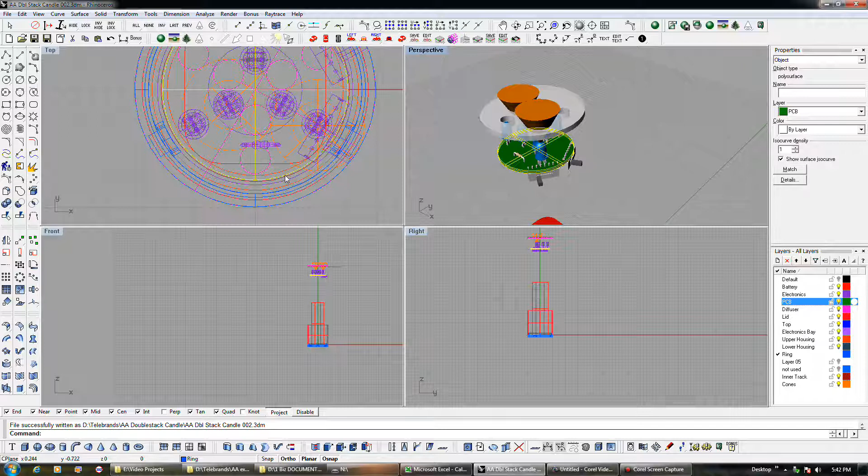Okay, I highlighted the circuit board because I was thinking this board's almost the right size. It's also, but it's a little too big probably.

But this is going to end up being a two-circuit board design, one for switches and the other for the LEDs. But we'll still have to see how that plays out.

Excuse the background noise, I got a 3D print running as an experiment.

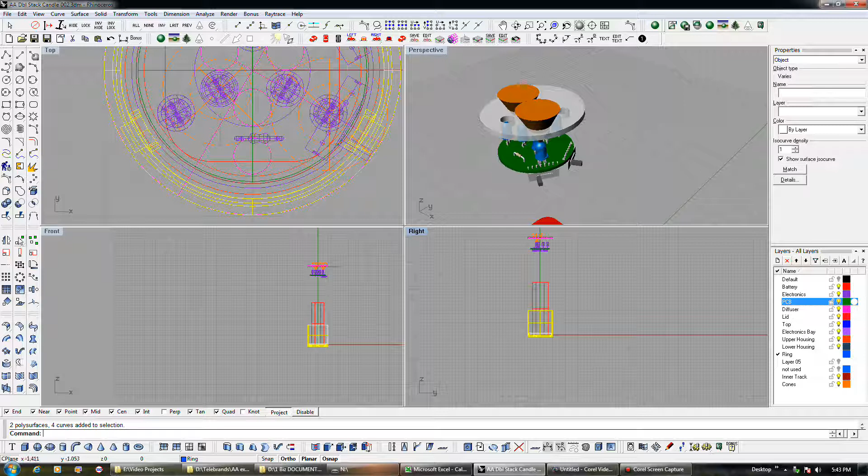So let me go ahead, now that we got this part done, let's go ahead and scoot this up here where it belongs, with that other diffuser. Okay, so that's where that's going to be.

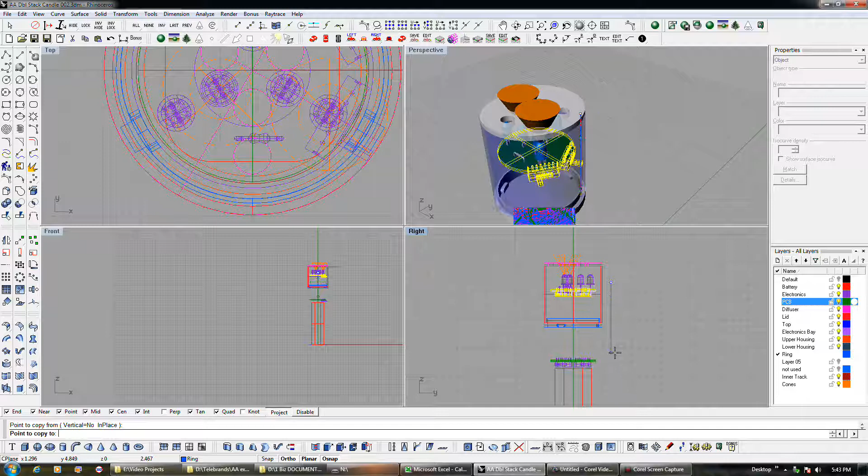Let me go ahead and, since I'm not sure about the circuit board yet, let me go ahead and grab this and copy it. I might use this later in one way, shape, form, or another. Let me go ahead and delete these two switches because they're not going to be there since there's the tube in the way.

This bottom, now normally when I do these designs I start from the bottom up. I usually start with a battery holder and work my way up. But in this design, given the constraints of this diffuser, I'm probably going to start from the top and work my way down, but it's going to be a little awkward for me, so just bear with me on that.

So I got to start thinking about how we're going to encapsulate this top part of the board. And remember, since this top cover is going to be a separate piece, it doesn't have to be the same thickness. That's why I'm kind of eyeballing this circuit board.

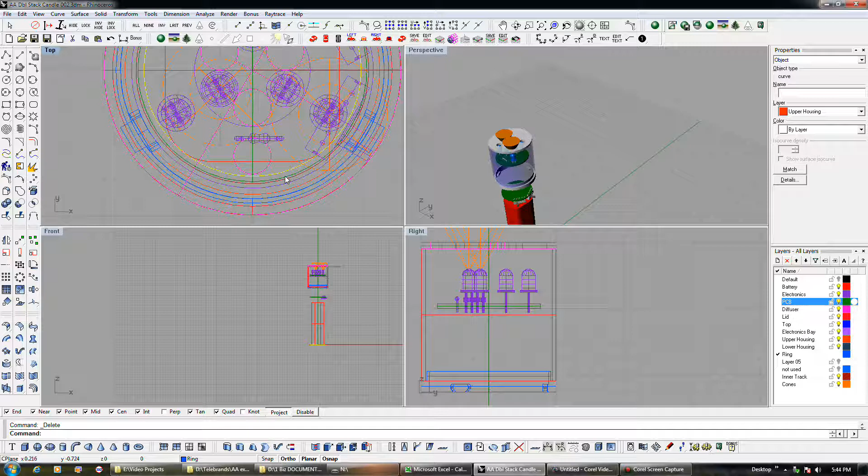Because if you recall, this is going to be our inner wall, and this is our outer wall, right? So the circuit board will be a little bigger than that, but that may actually be fine for what we're doing here. It just depends on how this whole thing materializes, and this is where it's going to get confusing, because remember, we got this track guide that we got to worry about.

Which, like I said, I probably ought to go ahead and put this diffuser in its appropriate position before we proceed any further. That's probably the best thing to do. So I can put it in its retracted position, until it says center.

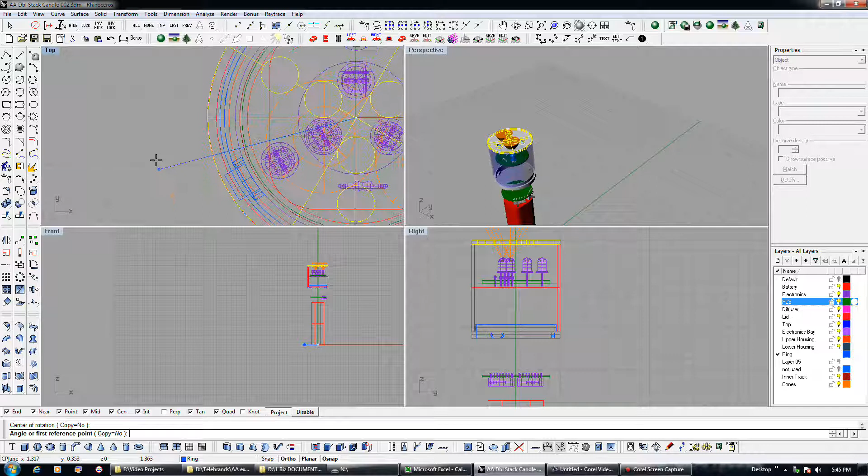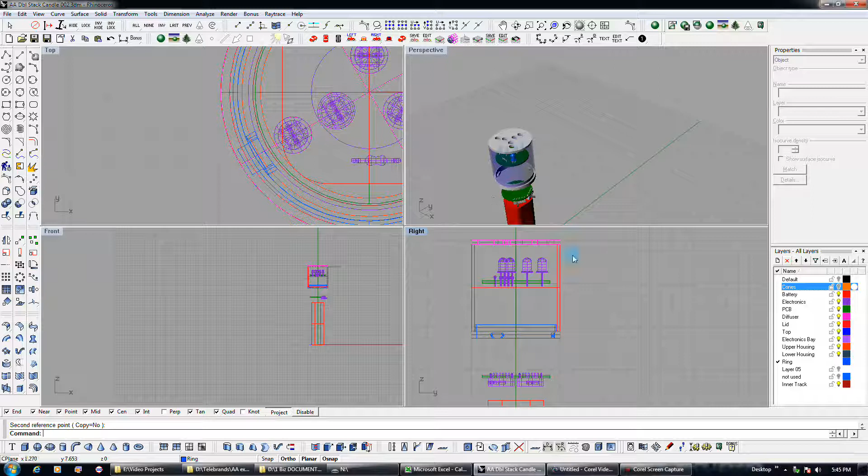There we go. Okay, I don't think we need the cones on right now, so let me move that up there. I always put things like this at the top. And blank those out. Let me again put this in its retracted position.

But we still don't know exactly what retracted means yet. Oh, come on. It's going to be somewhere around here. We don't know exactly where, but it's going to be somewhere around there. So it depends on how thick I make this lid and everything, but I wanted to get this basically in its retracted position, especially before we start thinking about drawing any guides or anything.

And that's where I want to position it, because this is going to be the guide. However I make these guides, and this is going to be complicated, but however I make these guides, that's what's going to be subtracted from this position. It's an easier drawing position, because I got to draw some kind of form or something, and it's subtracted from everything else. Probably that's probably how I'm going to do it.

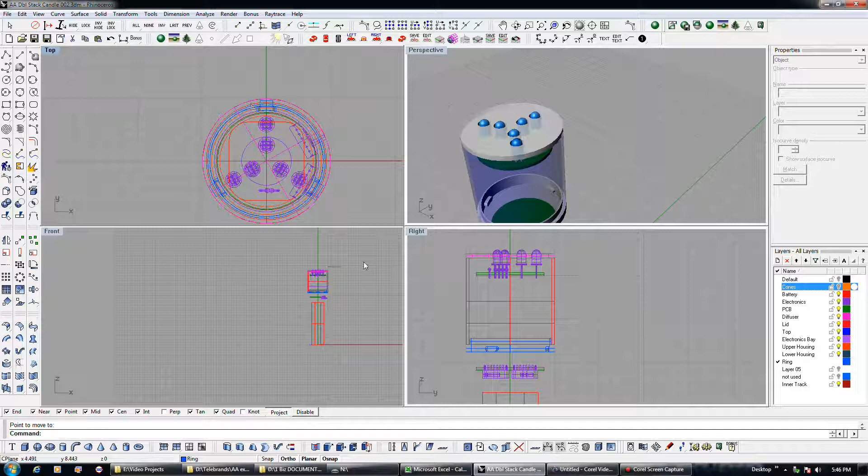We'll see. But for right now, again, this circuit board is a pretty attractive proposition, because we know, okay, this by all means is going to be our...

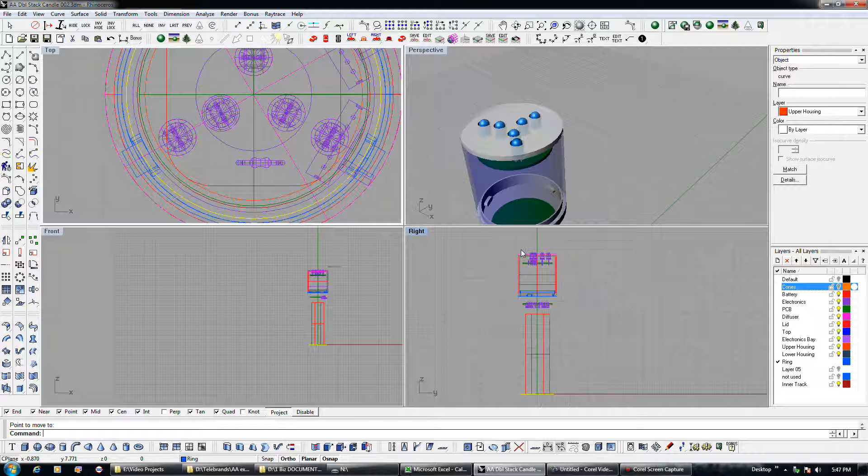In fact, since we're working on this, I'm going to go ahead, and I usually do things this way. I mean, you can actually adjust your coordinate system if you want, but in Rhino, I usually just adjust my model instead.

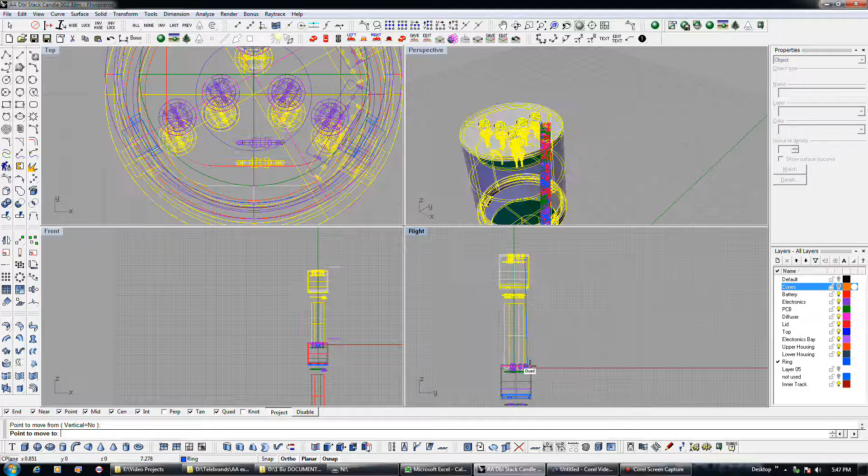I'm going to go ahead and grab this from here, everything except that circle, and put it on elevator mode. So I've adjusted...

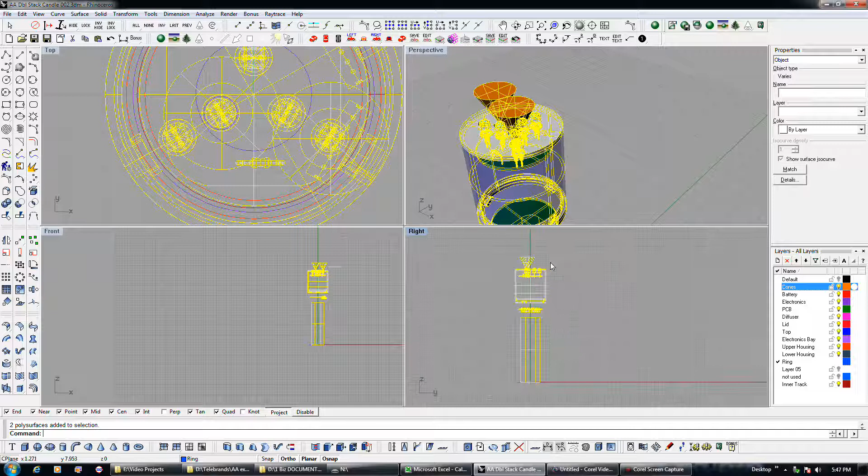Whoops. Hold on, let me light up the cones. Gotta make sure all my layers are on before I do this. That's one of the drawbacks to it. So I'm going to go ahead and adjust this.

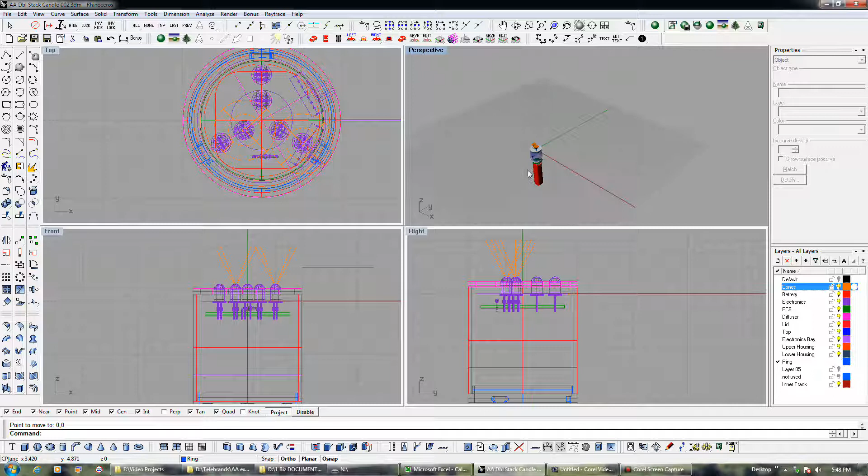Where it's down here, near our working plane. Oh, shoot. Okay, well, like I said, turn the cones back off. Don't need them right now. But like I said, this, whoops.

Okay, this is the outer part of our housing, and we'll want that to be part of the cover. So now this piece, when we print, this will actually be the bottom layer, and it'll print this direction. This will be the top layer. In other words, this part will end up being upside down, so we'll get a nice flat mirror finish on the top of this, which looks nice.

But the question is how thick to make it, and how are we going to do the bottom piece, because that I'm still not sure about.

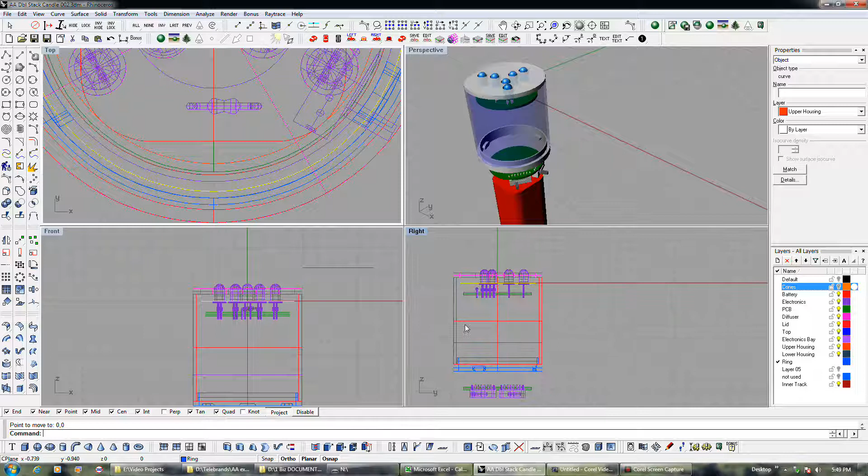Let me just do a test extrusion to see how things look right now going past that ring. So basically, that's how the finished item might sort of look, except it'll be a little higher than that. But you can see kind of the clearances of this inner ring and everything like that.

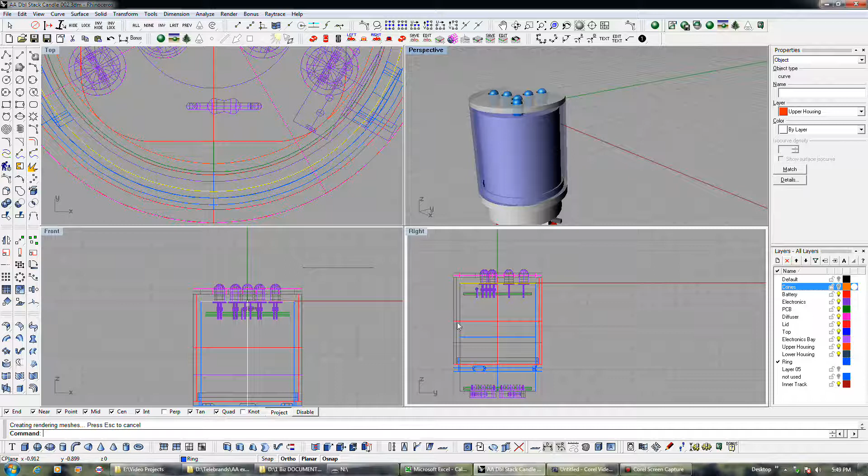We want to kind of keep that intact. There'll be a little bit of play between this and this, so it'll be a little wibbly wobbly, which I'm trying to avoid, but I can't avoid it completely in this case since we had to put this glue stopper here.

I was just thinking that I could actually make it so it's removable, the whole assembly is removable, and I'm kind of considering that possibility, but still I'd rather just do it this way. It's kind of hard to change your mind on a non-parametric CAD system, because we'd have to redo all of the work.

That's why, when you're doing this kind of design work, it takes a lot more with a program like Rhino or most other general purpose 3D CAD programs, you really got to think things out a lot ahead of time, because you could do hours of work, doing a bunch of operations on a single part, and then have to go start all over again if you need to make a significant change to it, particularly if that's fundamental. It's pretty aggravating.

That's why a parametric CAD system like SolidWorks or Solid Edge is way better to use for things like this. But they tend to be expensive. I'm not aware of any cheap parametric CAD systems right now. There may be some out there, but I don't know.

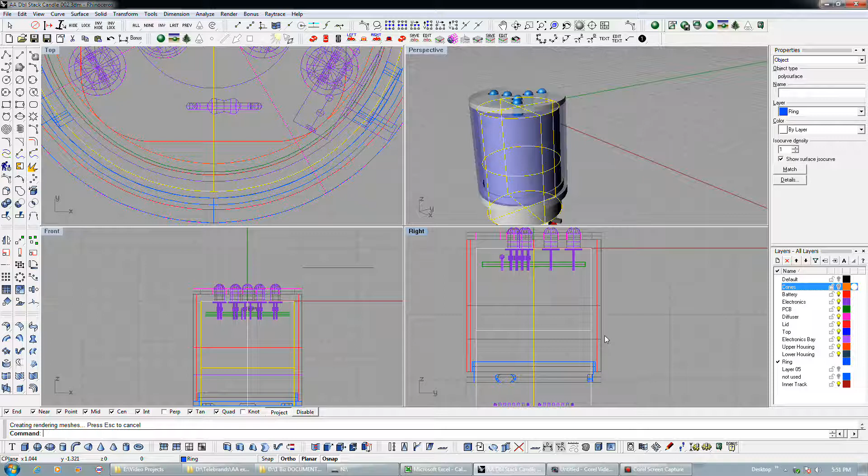Okay, but like I said, where exactly we want this thing remains to be seen. Again, this is too low. In fact, accounting for the thickness of the top of the lid, it would be probably more like there.

Giving us an effect like that in final form. Again, this lid probably just needs to be a sixteenth of an inch. It's not going to bear a lot of force or anything like that, so it really doesn't have to be that thick walled.

What I'd like to see for this circuit board is, and notice too how I have the standoffs on this LED a little bit above the circuit board, and that's because when you solder a circuit board, even with a hand soldering iron, it tends to expand. The circuit board actually expands in thickness. So by the time you finish making your joints and the circuit board cools down, there's almost always a gap, even if the LED is right down to the board, it's almost always a small gap under it, a good 10 mil or more a lot of times.

So that's why I have some tolerance in that too, because I certainly wouldn't want to make a lid or anything like that and try to stick it on this thing and have it not fit, because the LEDs are actually, this distance here between the circuit board and the LED base is actually taller than I think. So again, that's why you want to have some loose tolerances even on that.

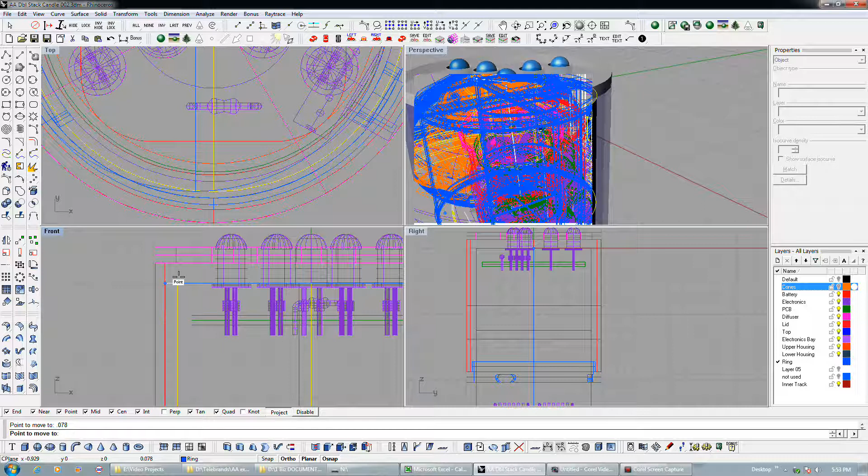Now, I'd like to add some tolerance, especially due to layer discrepancy and everything. Instead of making it 63 mil, let's make it 73. Actually, say 78, just to give us a bit more tolerance for error, because we'll make the wall thickness 63 mil, which is pretty exactly 1/16 of an inch.

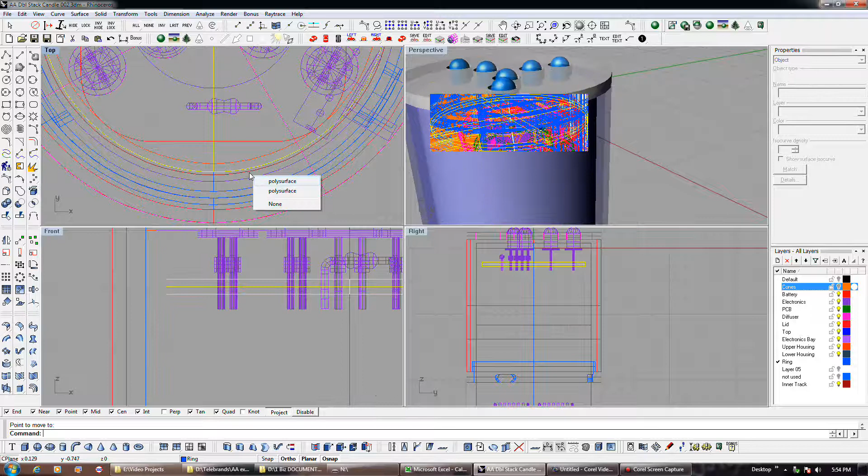Now, having said that, let's see this cap. So we've got our circuit board there, and this right here, let me see how wide that is. I think I know what this is. Yeah, it's about 13 mil.

It's about 26 mil total. Because when I actually make my circuit boards, they're going to be a little smaller than this, since I've got a kind of loose tolerance on my end mill. So the circuit board, whatever diameter it happens to be, is actually going to be a little smaller than this. But 13 mil on this circle here would be 26 mil total. That plus the discrepancy in the circuit board should give us enough allowance to where the board will fit.

If not, you can always sand a circuit board down if you have to, belt sander or whatever. So it's not that big of a deal.

So what I'll probably do is grab this little circle here. We'll just go ahead and reuse it, because that looks like a healthy tolerance to me. So I'll bring that down level with the circuit board. This is going to be our circuit board keeper.

And again, we're probably going to do switch wells, just like I showed you in that other video, for this design as well. So that'll be part of it. Now, doing switch wells is pretty complicated, and there's certainly other ways I could hold this in, involving fasteners or what have you. But yeah, I think I'm going to do it this way.

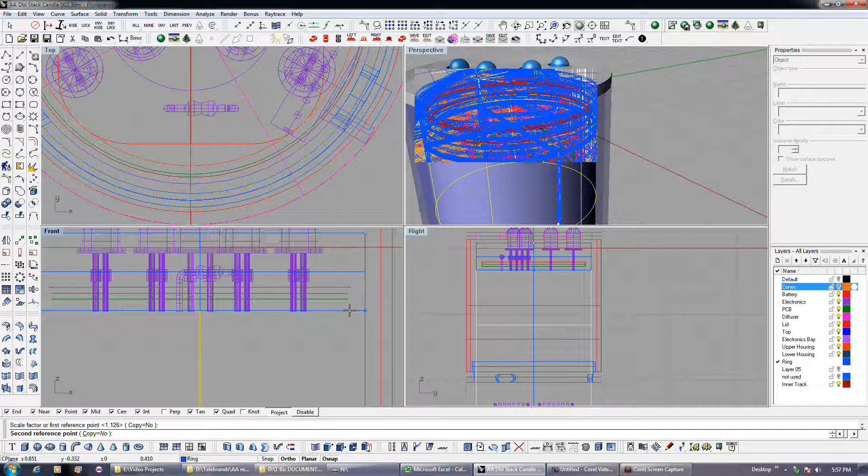Again, this is the opposite way I normally work, so just bear with me. But yeah, I think I'm going to use this here, which is not a half bad position. Let me go ahead and just do this.

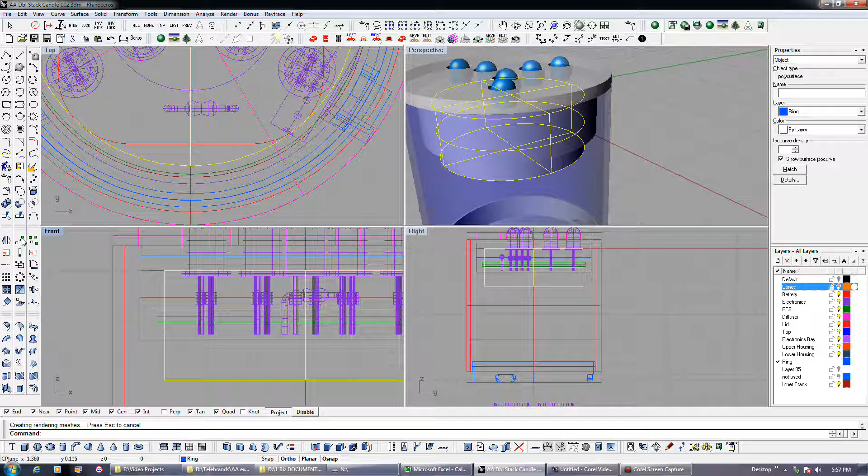Let's see what we have here. Yeah, because it's 78, 63. So that's 15 mil. So I'm going to move this down by 15 mil. Oops, sorry, move it up by 15 mil. So that should give us...

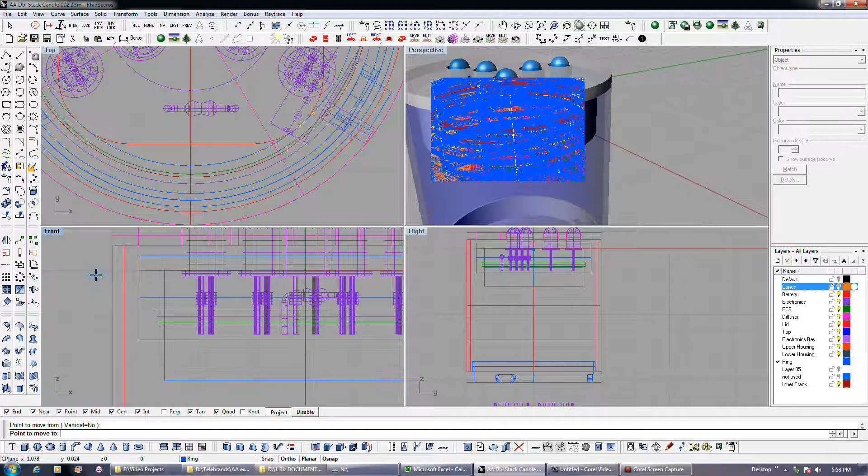Pull that out so it's straight. So that should be about a 1/16 of an inch right there. Yep, 0.063. So okay, that's that piece. That's going to come out of the center, and that will clear our LEDs, as you can see, between that and that.

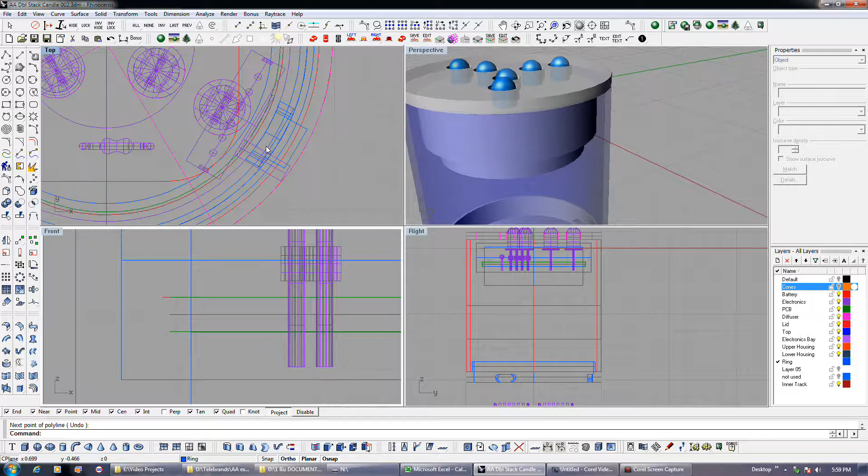Then next, I want to... let's see, I wonder how much space we've got to work with here. I might need to shrink this circuit board, and it's okay if I do. Just give me a better well, but let's see. I got to pay attention to what's going on over here, though.

For right now, I can go ahead and hide the diffuser and the lid, and... where is that on? Oh, ring.

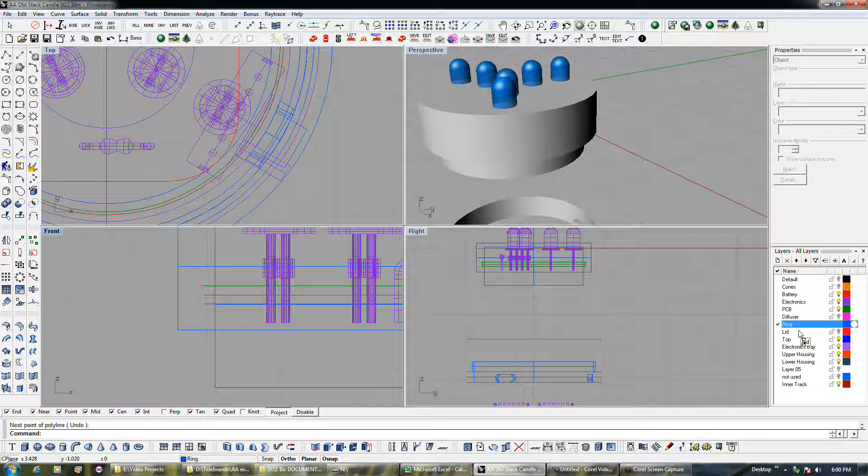Well, damn it, I need to be drawing on the top. Actually, so I'll change the object layer in those so I can hide the ring, all these concentric circles here, and keep track of what the hell they are.

Okay, so this basically, I think we can get rid of these right now. I'll go ahead and stick them on one of our not used layers.

But yeah, that's our outer lid there. But like I said, I might go ahead and shrink that circuit board, because I think we could use the extra space. And that circuit board from there to there, we only got about 88 mil, and like I said, I can get away with less, but that means I'll have to make this top part thicker though.

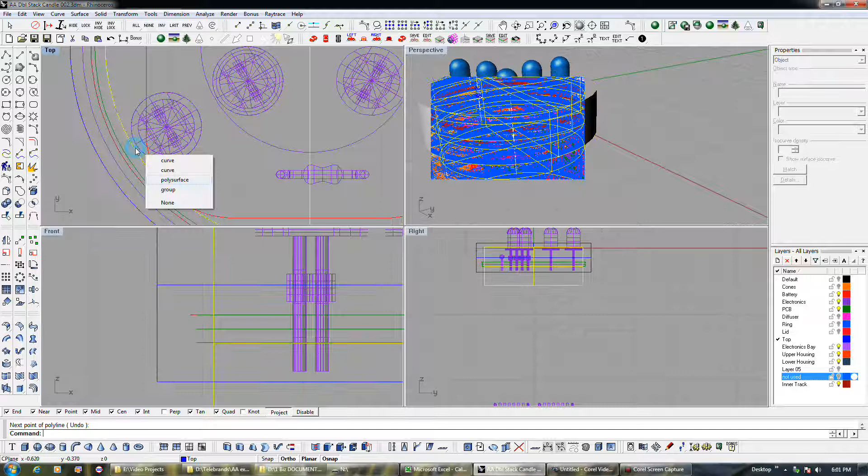Because I don't want it as thin as this, because I still want to capture it with a lid. So I want the lid acting like a positive hold down on it, so I can't shrink it too much and have it still clear our LEDs. In fact, that's a pretty minor, pretty small clearance right there. It's approximately 13 mil. It's pretty close.

Let's see. Because the thing is that I'd like, let me think about this for a second. Because I could make the lid itself capture the circuit board, sort of. But see, why I like to have a bay is because of our switch wells. That's generally underneath.

But actually our switch wells aren't going to go here, so what am I thinking? So actually, I could make the lid actually capture the LEDs then. And again, I'm thinking upside down here. This isn't the normal way I design these LED products, so I'm thinking from the top down. It's a little confusing.

Let's see. Since we're 3D printing it though, I could actually have a little inlet here, so the LED has a space to go. In the lid, I don't think that would be a problem.

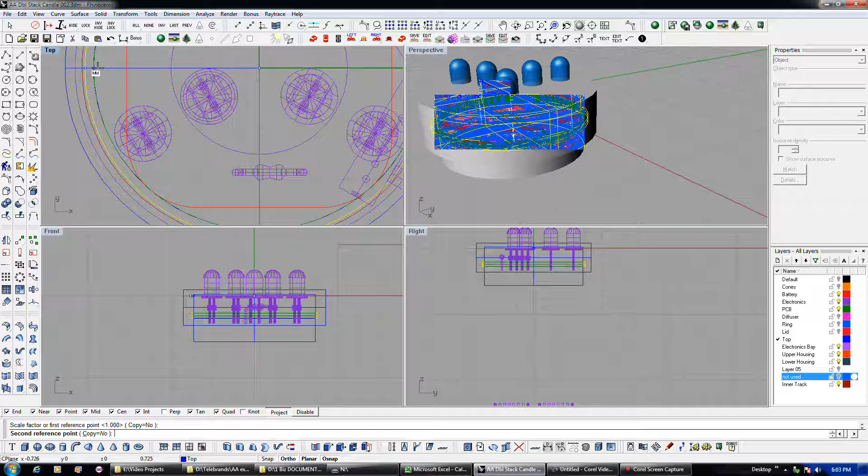Let me think about this for a second, because like I said, I definitely want a skirt coming down the side, kind of like we have here, about this distance. But that skirt actually could almost be based on this circle instead, and this LED board can go in. The LEDs will actually hold the position of the board so it doesn't rotate or anything.

I generally wanted to just keep that side to 1/16 of an inch. Well, I'll tell you what. Okay, so this is our outside, right? So let me go in and draw a circle. Okay, but instead of it being a diameter of 1.701, I want to subtract.

Some CAD systems you can actually do the math right in the damn entry bar, but I don't think you can do it with this. Let me try it. 1.701 minus 2 times 0.063, because we want to take off the diameter.

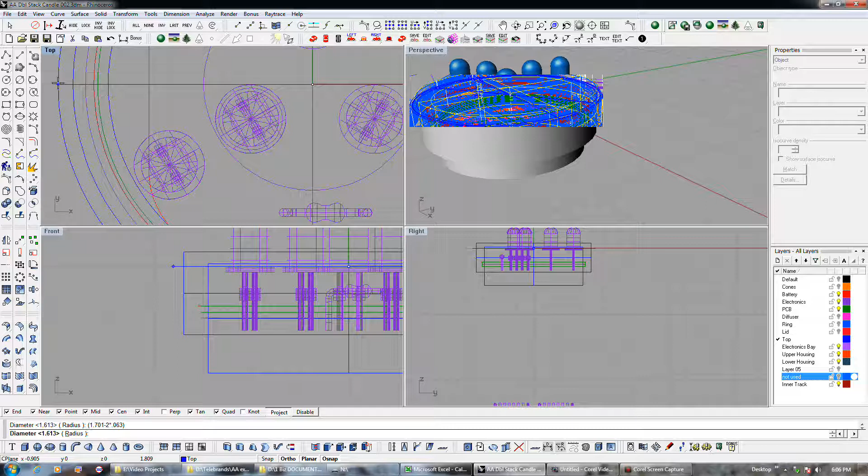It's not working, son of a bitch. Anyway, fuck that, let me go in and make this 0.063. Okay, because I don't want that wall any thicker than that.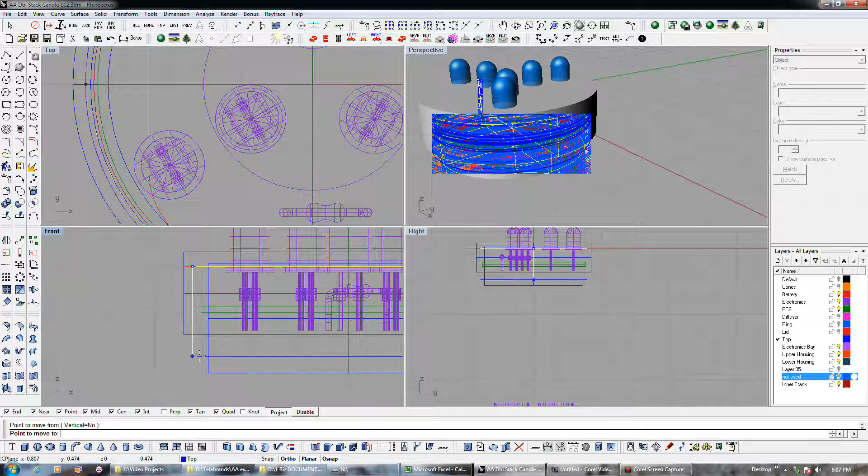So, let me move that to the bottom. Well, let me just move it down here. Okay, so ideally, like I said, what we'd actually like to have is that come up to the bottom of our circuit board. And, well, I'm going to leave that.

And we want our circuit board to actually fill that out. I don't know what the discrepancy is between the two. It's only about 24 mil. I mean, that's okay, it's a little loose on the tolerance.

Well, let me make the circuit board just a little bit bigger in diameter. I'll bring it out to our old circle there, so that gives us a little tighter of a tolerance on it, of about 11 mil per side. Well, keepers.

Put it about right there. Again, like I said, the circuit board's going to be a little smaller than this anyway in practice, so I'm not that worried about it.

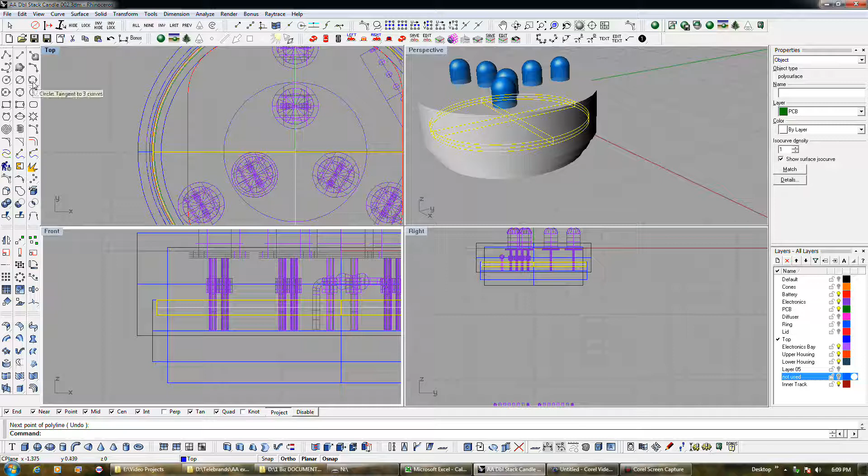Okay, so now that I got that done, let's go and draw us some circles. Now this is going to actually cut through it, so like I said before, that's about 200 mil, so let's make it about 228 or so.

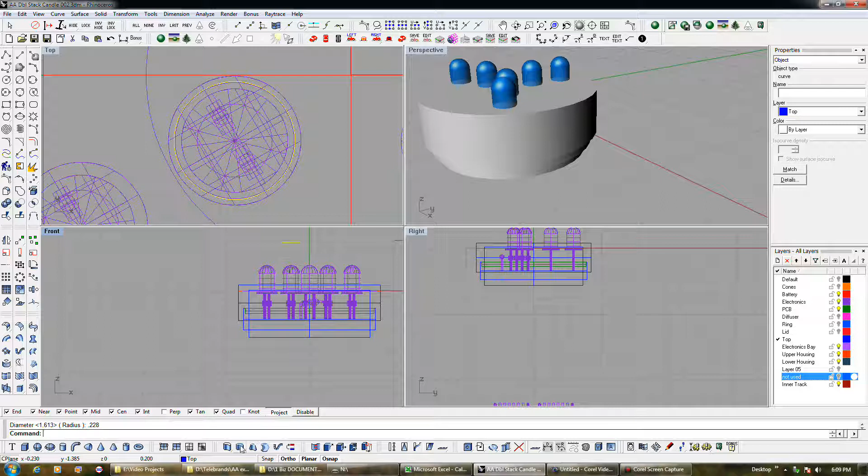Okay, I'm going to move that up there and stretch it there. Okay, I'll copy this and center that to the center of that, and select the last object created, and then let's go do one of these things: circular array.

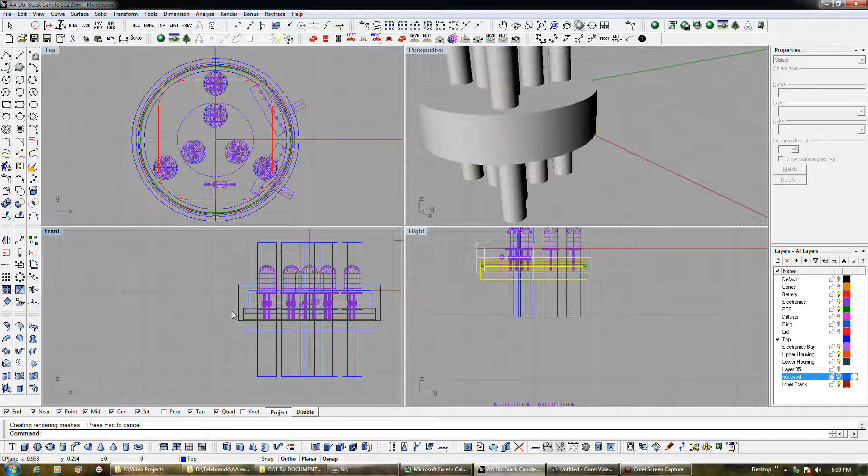Now let's do our Boolean subtractions. We'll start with this one, and then we'll do this one, and then we'll do this one. Okay, so now we have this thing carved out, as you can see.

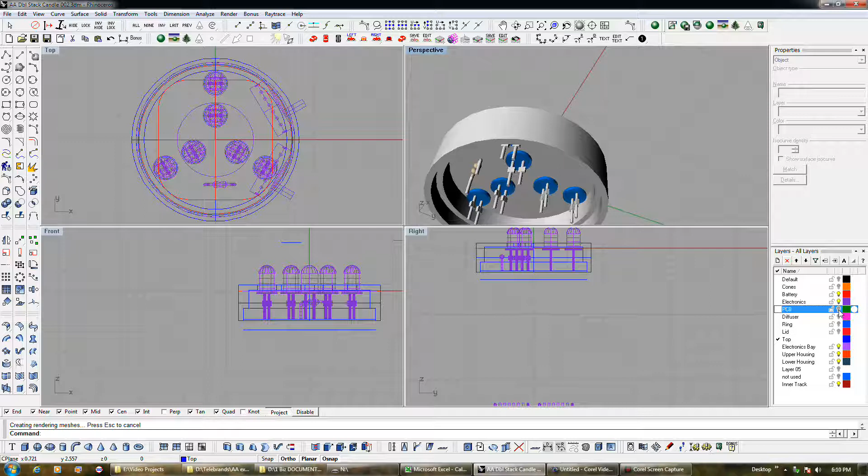Now I don't know whether I'm going to put any resistors on there or not, but I might. If we got the extra real estate, that'll make our other circuit board smaller, the one that carries the switches. So we'll see. I haven't decided on that yet.

Anyway, so that pretty much... What the heck is that? It's not necessary. Go ahead.

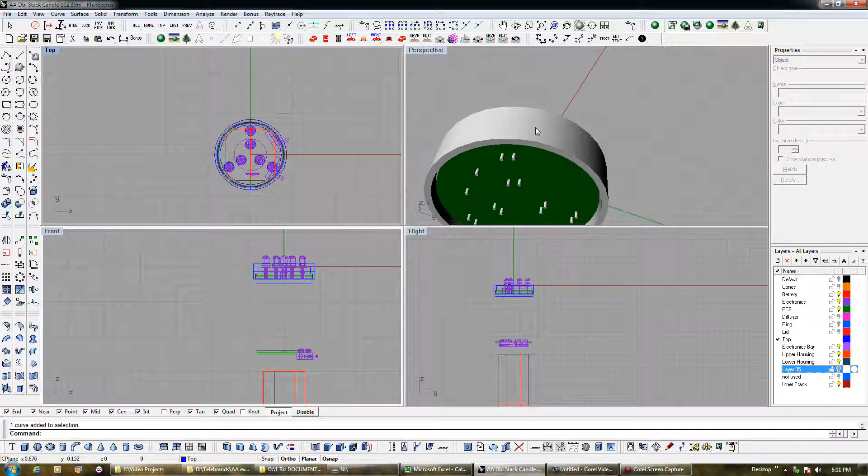Now usually I try to use this layer for objects and this layer for like curves and lines, but anyway, so basically when we make the circuit board, we'll populate it with LEDs and just stick it in there and align it with the holes, and that'll hold it, and then this will be fastened down and glued to some sort of carrier.

Now the thing about it is, that's not very much distance. It's probably not a problem though, but I kind of like having more to work with in this, because this is almost 1.5/16. I should have made that part a little longer so we'd have more surface to glue to, but I don't think it'll be a problem.

Muse on that for a second, but yeah, I don't think it'll be a problem.

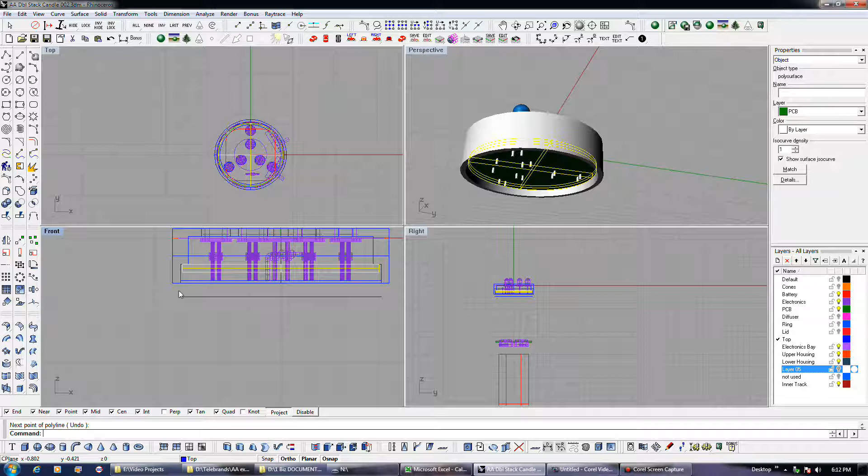Anyway, this part of it, this lid is certainly not going to have our ring come anywhere near the lid. I mean, we're not going to end up with a crack in it. Oh, that's what that line was.

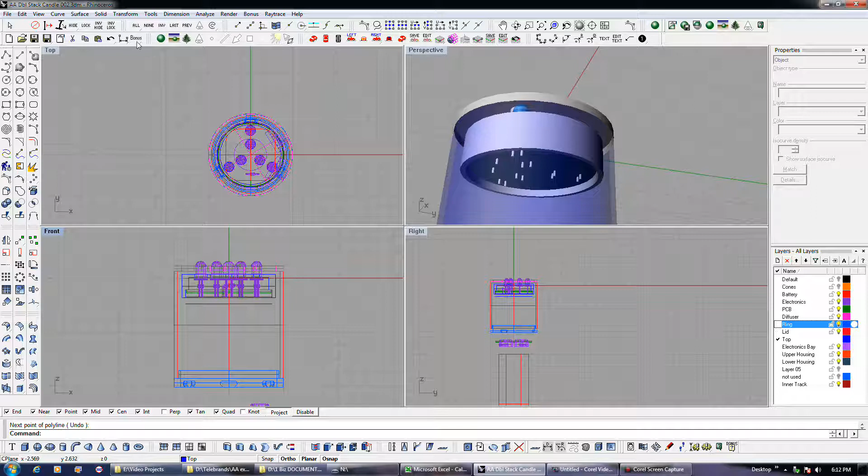Yikes. That line was. Let me grab that and keep it. Use the redo key. This thing doesn't undo and redo everything.

I'm going to put this in the cones layer so we don't lose it in the future.

Yeah, like I said, this is going to be the maximum height, and I'm certain we're going to make this tube less tall than this before too long, but that's getting ahead of ourselves. Let's continue with what we're doing for the moment.

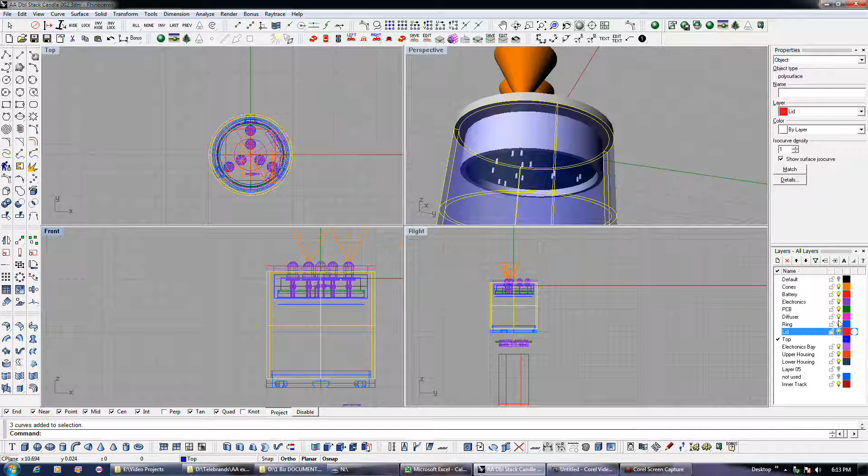But anyway, the reason I brought that up is because I don't think that little slider is going to go into this piece. I mean, we're not going to have a track in this piece of it. So that's going to be well below what we're going to be dealing with.

So we're okay with these wall thicknesses. We don't have to worry about some piece having to slide through here. And when we do our switch circuit board, that'll be below that track position, much as it's shown here.

I mean, it'll be below the rings because, under no circumstances do you want your switch to be inaccessible because some plastic tube is covering the switch up, even if it would be possible to slide it over the switch.

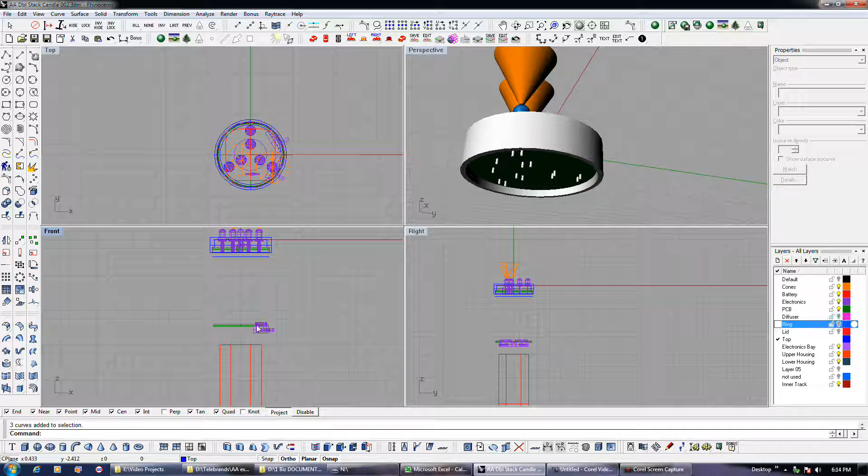Okay, so that's got our basic carrier for the top made. Now I'm going to have to make another piece for the bottom that actually complements this. It will have a little wall that goes up in it, but I got to think about this for a while, so

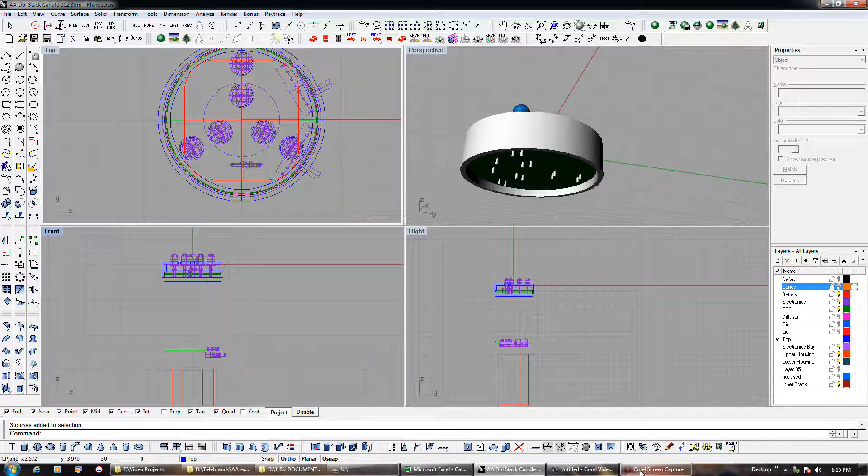I'll break off the tape here and tell you what I decided, so I don't bore you with my thinking process.